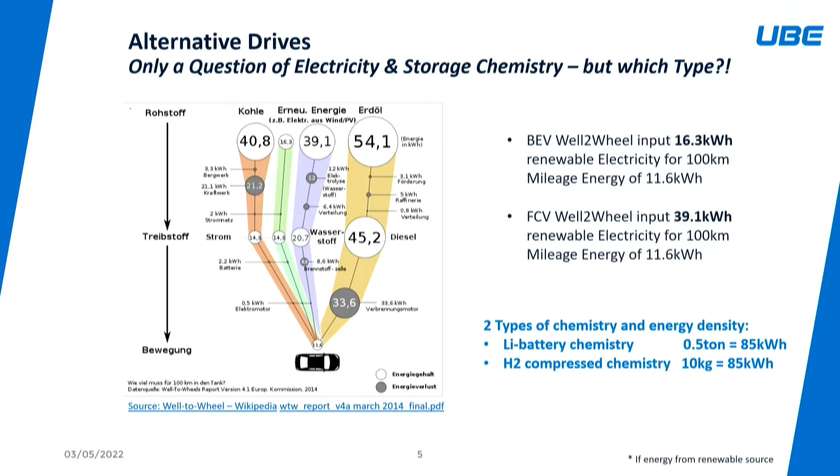So okay, let's have a look at this one. We already discussed we have two types of electrical technology at the end of the day, but the difference is in the chemistry, and that gives you a difference in well-to-wheel consumption. So apparently the battery electrical car gives you a great advantage in the conversion ratio of the energy input into the car, directly from the electrical network or from your solar system on the house—the conversion ratio is the best. It's an excellent conversion ratio of energy.

And obviously the hydrogen first has to be produced, and then you create a lot of heat in the FCV stack when you drive, creating the electrical energy that you need for your electrical motor. So there's a lot of data out there in the literature. I picked this one because it starts from the primary energy, and we have a difference with a factor around 3. So the battery electrical car is converting the original energy about a factor 3 better than the hydrogen car.

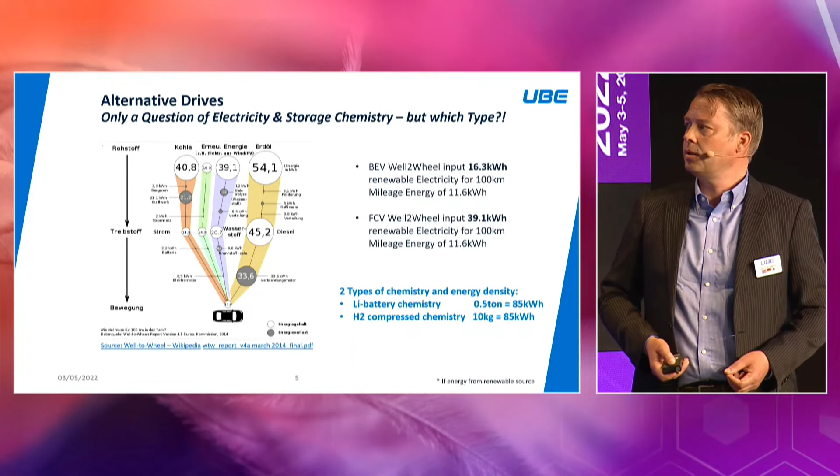But on the other hand, I want to show you the blue part of the slide on the lower right side. We have a completely different energy density, and that is the chemistry—this is the difference in the chemistry. H2 compressed chemistry delivers in 10 kilos of compressed H2 the same amount of energy that you expect to have in an electrical car like a Tesla S, for example—85 kilowatt hours is roughly the capacity of a decent battery electric vehicle. So we have dramatically higher energy density in the hydrogen, and that leads me to the following intermediate conclusion.

It's a little bit like wind and solar used to be in the past. 20 years ago wind power was all over the world, and it was very efficient and successful. On the other hand, I was myself in the solar industry 20 years ago. Everybody said no, it's too expensive, the semiconductor technology is simply too expensive, the efficiency is too low, the conversion ratio is not good enough, you need a lot of area. And apart from the real believers, nobody in the broader market believed in this technology—look at where we are today.

So what I want to say is that the battery electrical vehicle and the hydrogen vehicle are complementary, same as wind and solar. It's as complementary as it could be. So we are talking about electrical vehicles—they are silent, we can utilize renewable source energy, but the difference is in the chemistry, and the chemistry gives you the advantage and disadvantage on both sides. So now let's have a look more at the technical side of things.

I'll spare you the details about the components of an FCV car. I assume you're more or less aware of them already. And of course, one of the heart components is the hydrogen vessel.

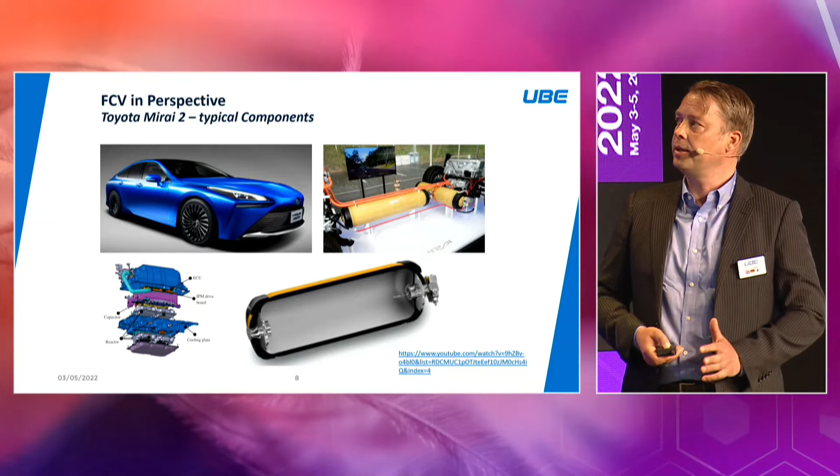Here, for example, the tanks that store hydrogen have to be tested in a very extreme way. This is a Toyota video, by the way, a Toyota official video. You can see that they even shoot a bullet through the vessel, and then look at how the vessel degasses. Let me show you the video.

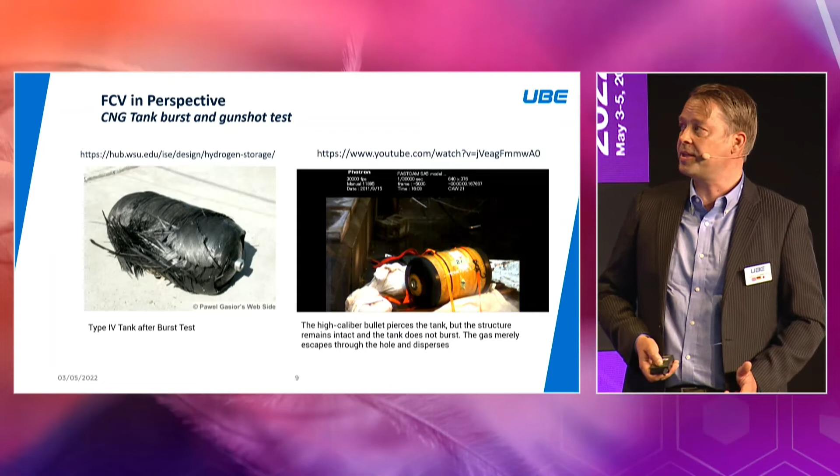See the bullet going in. You can see it creates a lot of dust, and automatically the vessel starts to degas. This is a very severe test. I wonder, do we do this with a fuel tank? Nobody is shooting into a fuel tank. So we're shooting into a hydrogen vessel just to make sure this works and is safe, and I'll come back to this a little later.

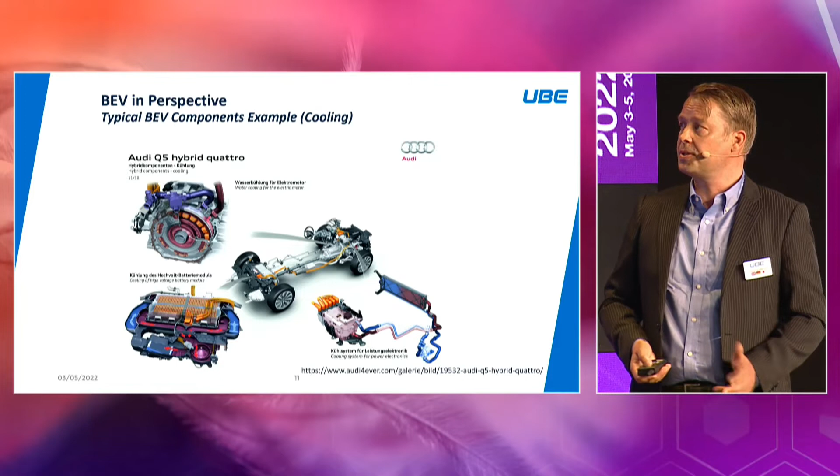But is a battery electric vehicle totally safe? Let's have a look at the components. Again, let me spare you the components—it's pretty clear, it's just for the totality of the presentation.

That is a situation you don't want to have in a battery electric car. So what happens in the lithium-ion battery when you overheat? In the end, you create the nice picture on the left, and it's a nightmare for the fire guards—because then you have to come in.

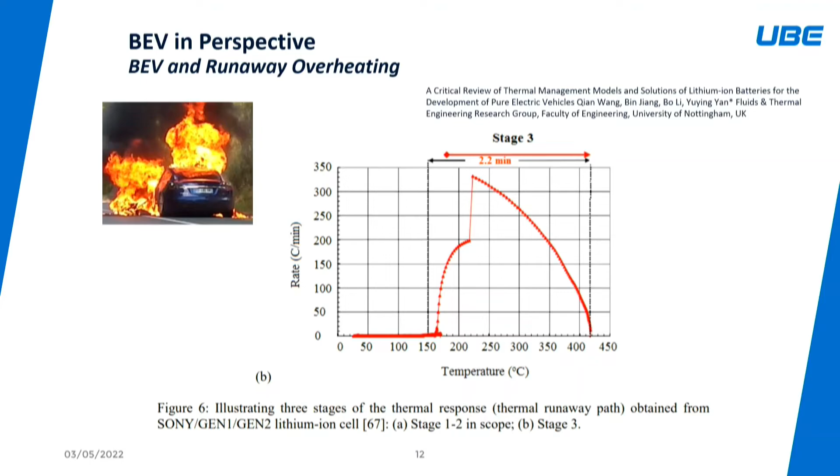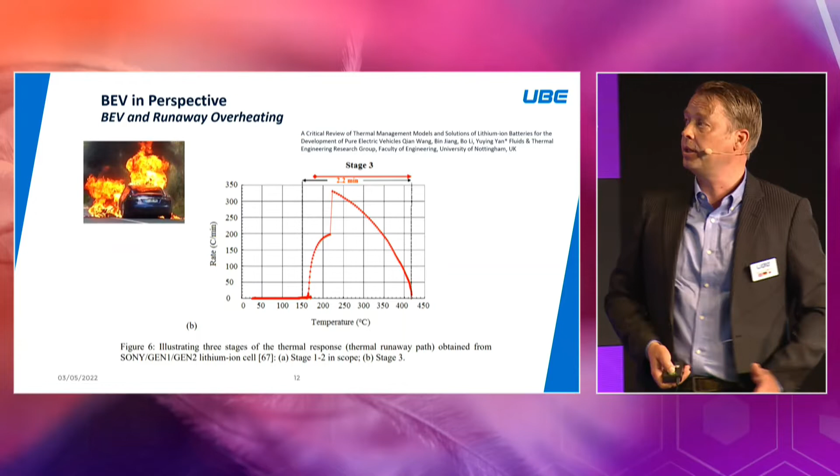Now the fire brigades here in Germany, for example, have a special container with gallons of water, and when the car burns, they drown it in water for 24 hours just to cool the battery off long enough to stop it from reigniting. It's a massive problem—we've all seen the pictures in the news.

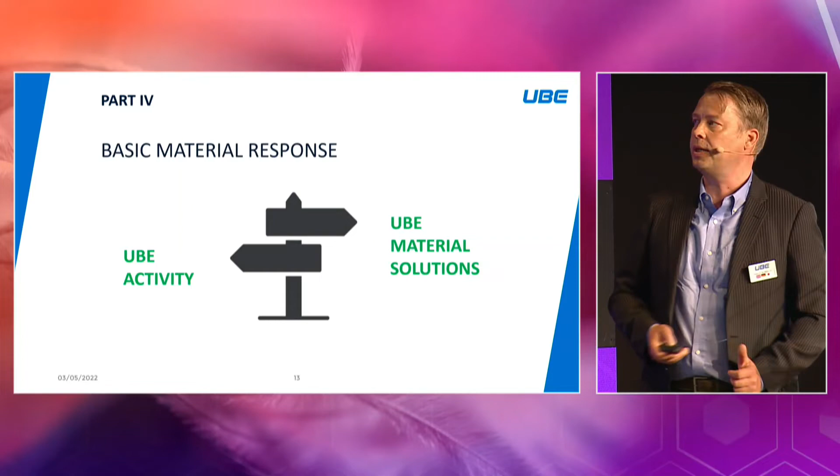So on the other hand, let's look at the material solutions and who UBE is at the end of the day. Let me go through our company. We are a Japanese company with around 10,000 employees, originally located in the south. Of course, we have headquarters in Tokyo as well.

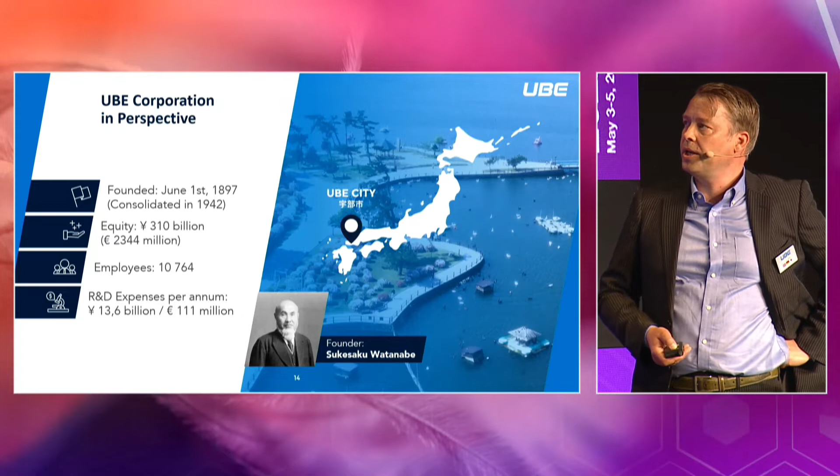We have several different business segments—this has already changed a little bit, sorry, this presentation isn't 100% up to date. I want to guide you to the chemical side, and more specifically to the nylons we produce. We are a nylon producer, not only in PA6 but also in PA12. That's why we have a lot of exposure in the automotive market, and we have all sorts of polymer combinations.

We produce these nylons not only in Japan, but also in Thailand, in Europe, in Spain, and we have compounding plants all over the world. So our footprint is basically global, and we supply our materials in a consistent global grade supply way.

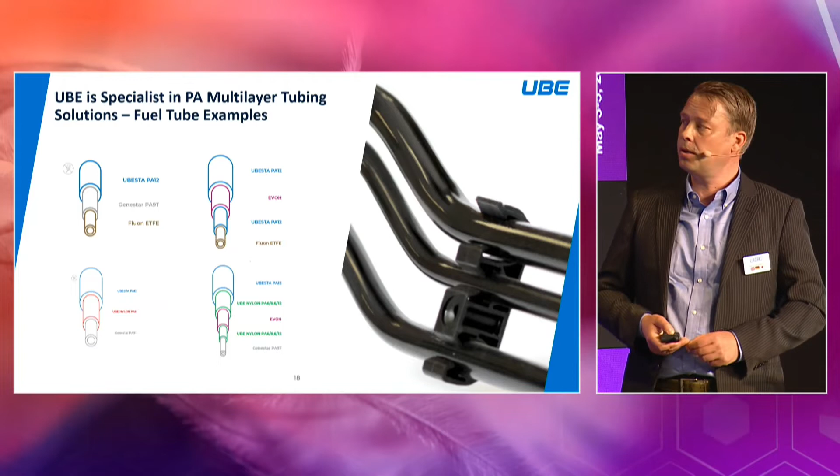We come from PA12. We are very strong in the fuel tube market, but the fuel tube market is a dinosaur in the automotive industry now. I just want to show you this to give you a perspective of where we're coming from—we are deeply involved in the automotive industry.

When you come to battery electric material solutions, starting from nylon 12 or engineering plastics, you immediately go into another type of tubing—coolant tubing—requiring ethylene glycol resistance, refrigerant resistance, and hydrolysis resistance.

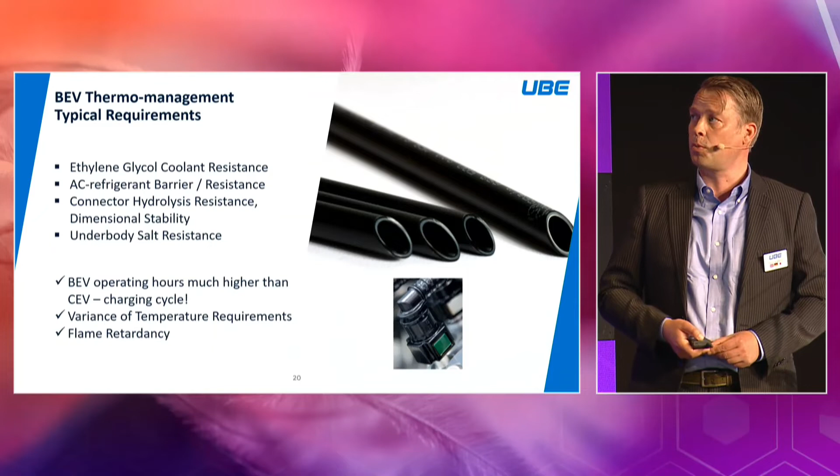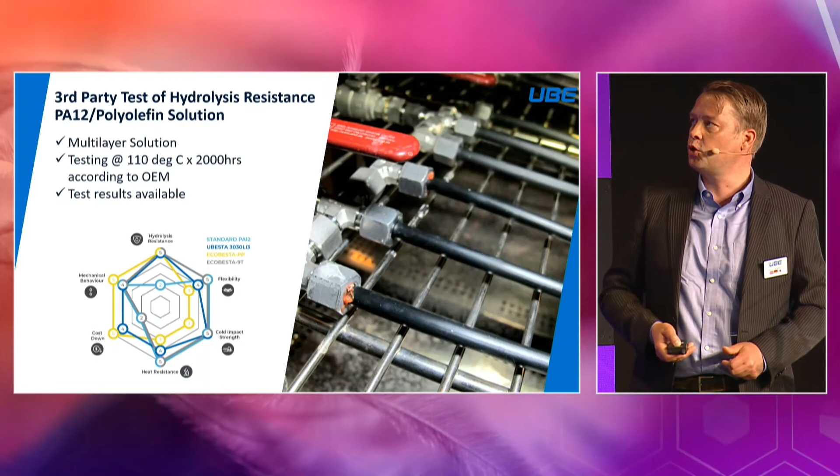So more interesting—okay, I'll spare you the coolant tubing here, and let's go to the BEV materials. Intentionally, I do not start from the materials themselves.

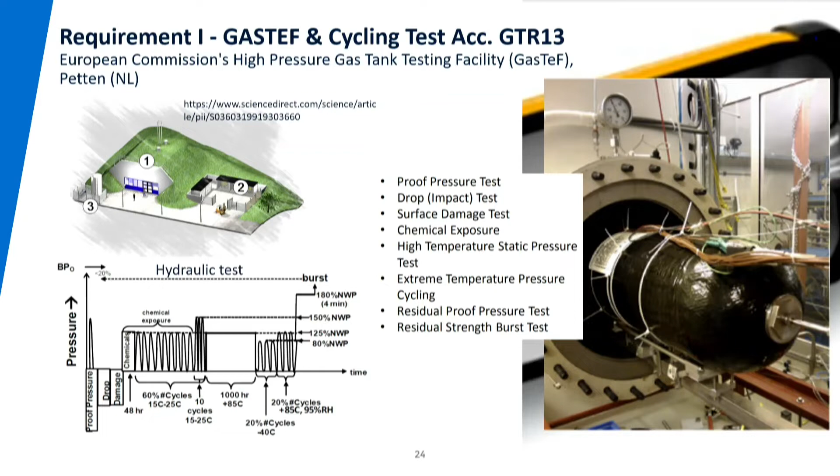What I want to familiarize you with is the way this industry creates a pressure vessel that can take a 700 bar working pressure and 820 to 840 bar loading pressure. So, like I said, you don't want a situation where there's an uncontrolled burst of the vessel. This is exactly what you want to avoid. And there is a lot of regulation out there from the UN approved GTR 13.

I just put a number of typical tests that are being performed. There are two most important tests. That's the hydraulic test that you can see here. And the test is so harsh, so brutal, that you do this in a bunker, or if you don't have a bunker, some people have rooms where they put steel plates, 2 millimeter, and you can really see the scratches in the steel plates after bursting. It's really deep scratches. There's this energy when you burst.

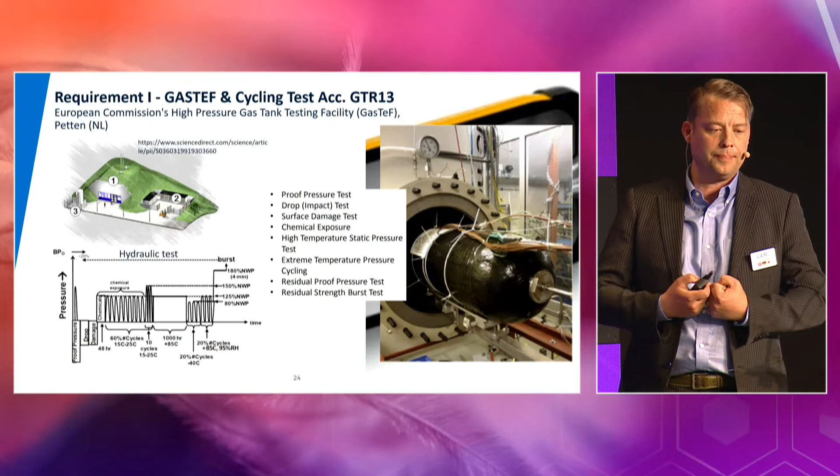The vessel is so huge, it's unbelievable, it's really a big energy. And then here you have the cycling test, the hydraulic cycling test, that is really bringing the vessel to the edge of what it can do. It's very harsh testing, very brutal testing. I don't think in the polymer industry we have something else that is so brutal.

And on the other hand side, you have road performance testing, it's also a cycle testing. But I have to be fair, you do this with a battery electrical vehicle as well. You really put the thing in flames, you do a fire testing, but it's a very harsh fire testing. And here, different to a battery electrical vehicle or a fuel tank in the combustion car, you really have to have the venting.

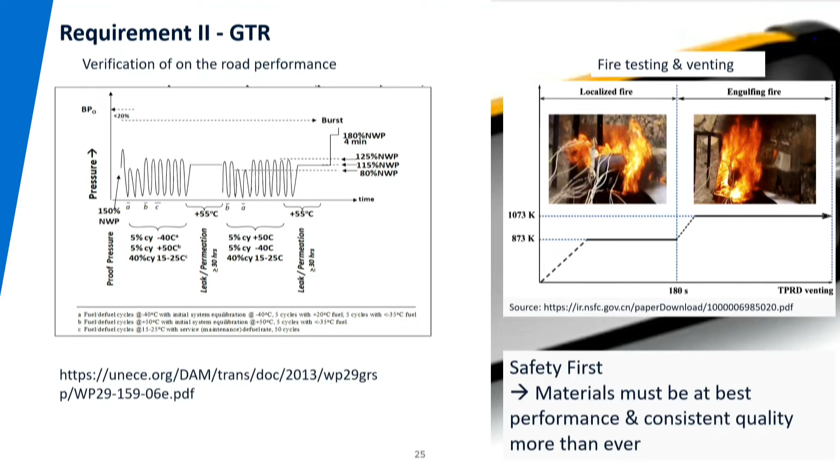The TPRD venting, you have the valve, and because of the fire, logically the internal pressure is increasing, and then there should be a controlled venting of the hydrogen. This is a very important point. That is what you do when you want to know you can create, or you did create, a good vessel that is up to the certification of GTR.

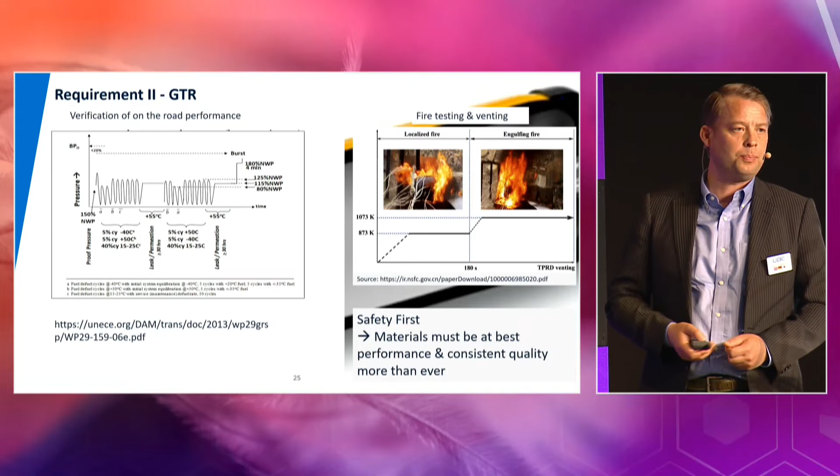And I just want to show you a little bit how deep we go in this industry for the FCV car. On the other hand side, what's the material requirement? The first and foremost material requirement is barrier to hydrogen, nothing else. So, which material gives you a really good barrier?

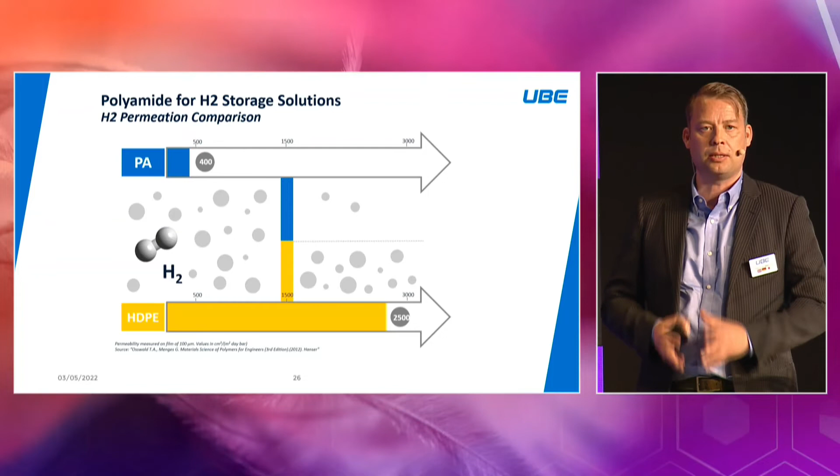There have been all sorts of HDPE vessels out there for low pressure, for CNG for example, or LNG, where you have a much bigger organic molecule than H2. H2 is very small, it's a very small molecule, it has the order number 2, so it has a very small molecule. And not a lot of polymer materials are having a good barrier to hydrogen. And nylon is the material that gives you an excellent barrier to hydrogen.

And on the other hand side, you have to mold the material. Obviously, the material is also modified, it's not pure, we'll come a little bit later to this. It's not a pure PA6 or nylon, but it's a modified material, and you need to mold it.

Now it depends on which type of player you are talking to in the industry. Some people are more familiar with blow molding, other people are familiar with injection molding, some people are really good in welding. But for this industry, for the molding industry, I put this a little bit controversial here, because at the end of the day, I'm saying melt and weld. In some sort of way you have to create a melt, and in some sort of way you have to weld. And the funny thing is, you are not coming out of this situation without welding of some sort.

You only have to widen your perspective. What is welding? At the end of the day, what you need to create is a consistent matrix in the molded part. And whether this is a weld, or this consistent matrix is coming out of the melt, in the end it doesn't matter so much.